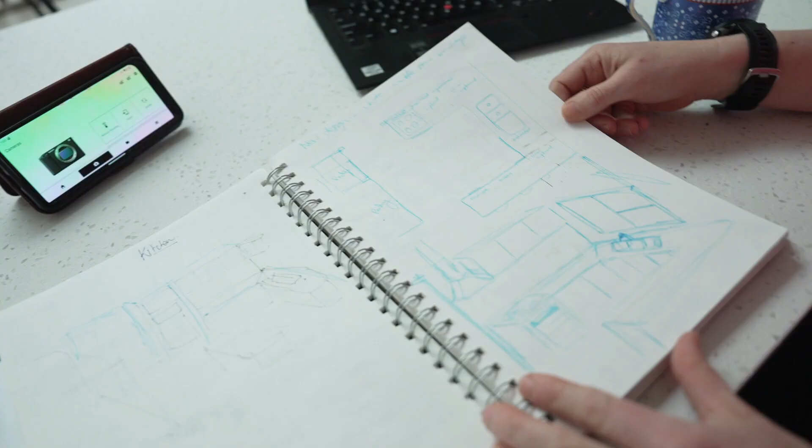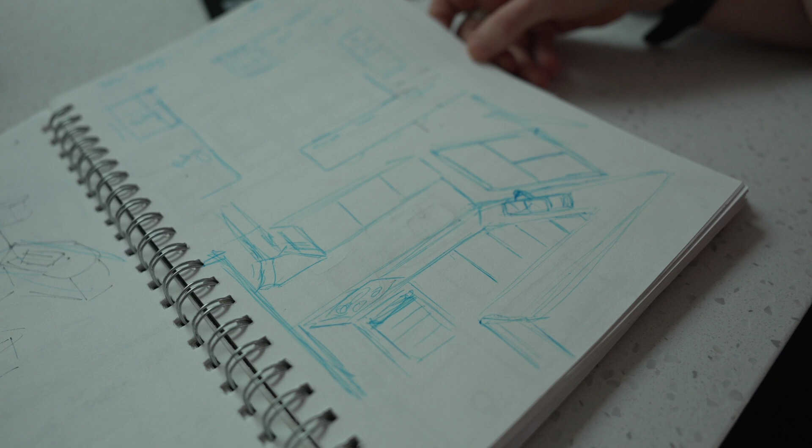So you can see as we're looking at this one, she started with a sort of 2D map where she's looking at, all right, where does everything fit? What are all the measurements? What does she want to do there? And then she's also actually drawn out a bit of a 3-dimensional idea. It's not obviously an architectural drawing, but it does give you a feel for what things are going to look like, and then you can start to place things in the space more accurately.

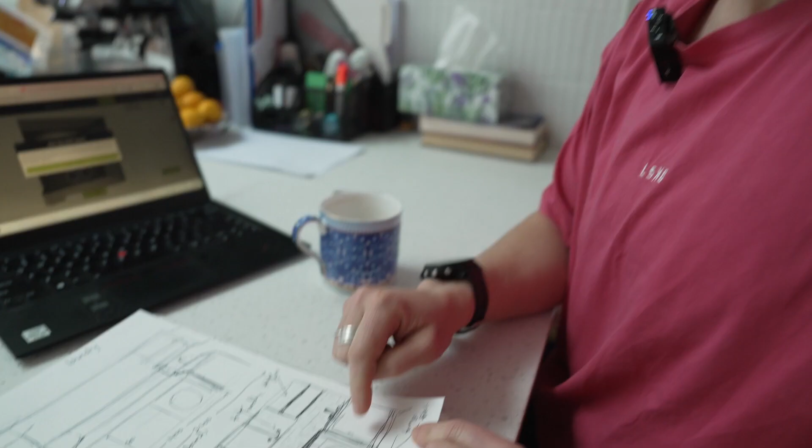That's one of the first laundry drawings that I mocked up, but that's when we still had the water heater in. So I thought, now we can change that because we don't even have to account for the water heater. Cool, so we've got our measurements all down.

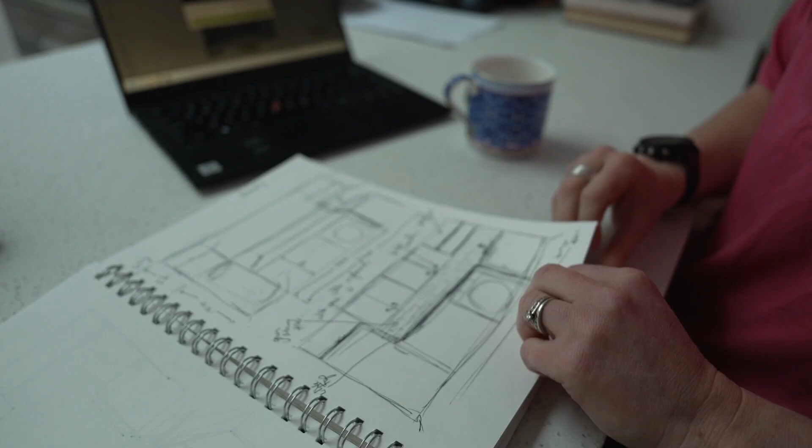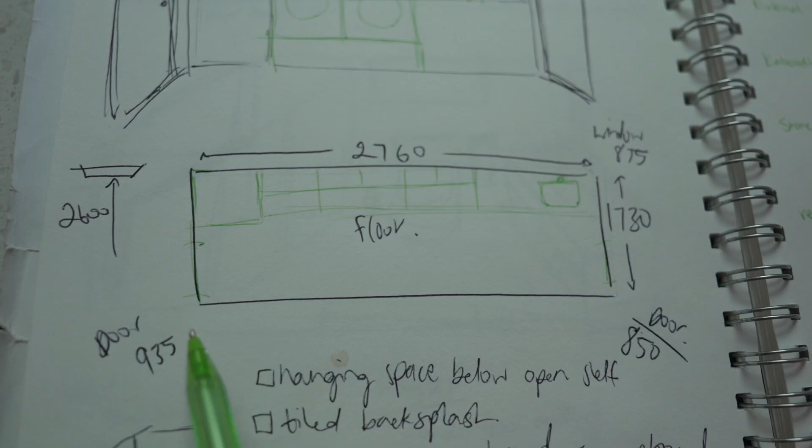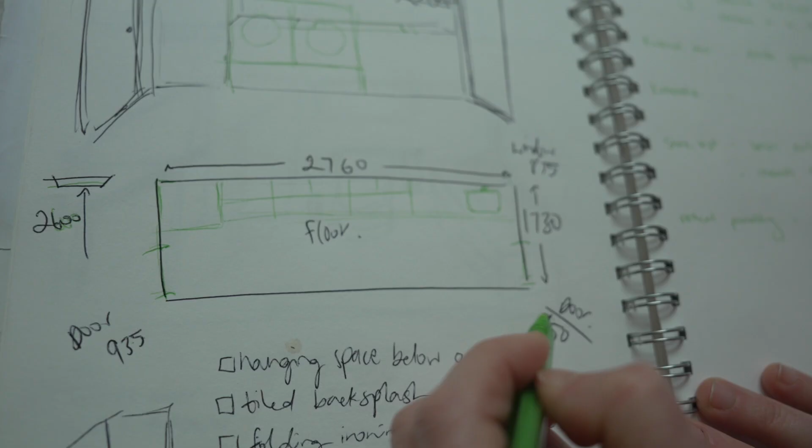So here we go. Floor plan, we've got wall length, width, and then the height is 2700 - we know that. Oh sorry, 2600, floor to ceiling. And then we've got the doors, a 935 on that side, and this side is 850. And then we have a window there as well.

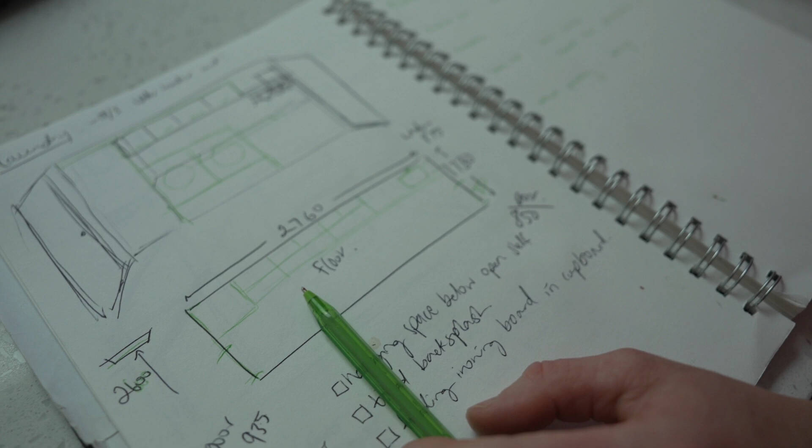So once you've got your measurements down, next step is going to be going into a great app called the Kaboodle Planner. So let's have a look at that now.

Now Jess found this awesome app that's free to use by Kaboodle that you can use to build out the laundry digitally, and you can see then like a proper 3D image. And it's really great - we found when we were measuring it on paper, we could actually see what products are going to fit in that exact space. So Jess is going to run us through that, and we'll have a look at how it looks.

So it's Kaboodle Planner login, it's a 3D planner. And then once you get into this, you will have to set up an account. And then once you've got an account, you can scroll right down through to here, design in 3D, open planner, and then you can start designing your room.

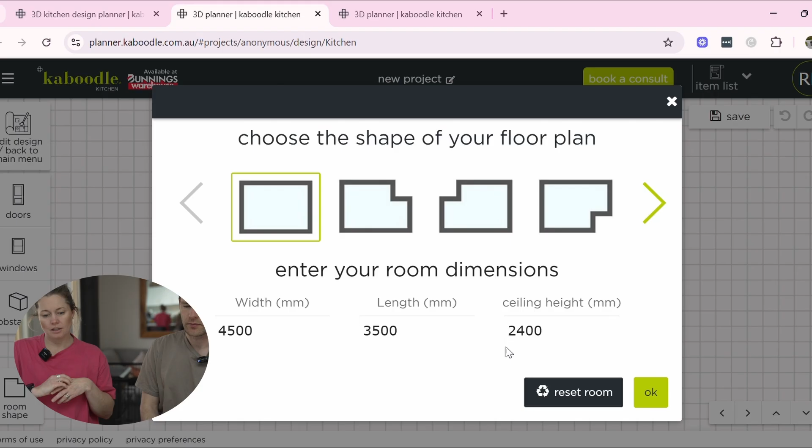Okay, so you're gonna enter in your room dimensions, 2700, and it's created my floor plan. Once you've got that, the first thing that I like to do is put in all the things that you know are there - that's your doors, windows, any obstacles that you might have in your room, like pylons or things that are in the way there. So let's add those in. We've got an internal door, and that's that one, and we've got an external door, which is that one.

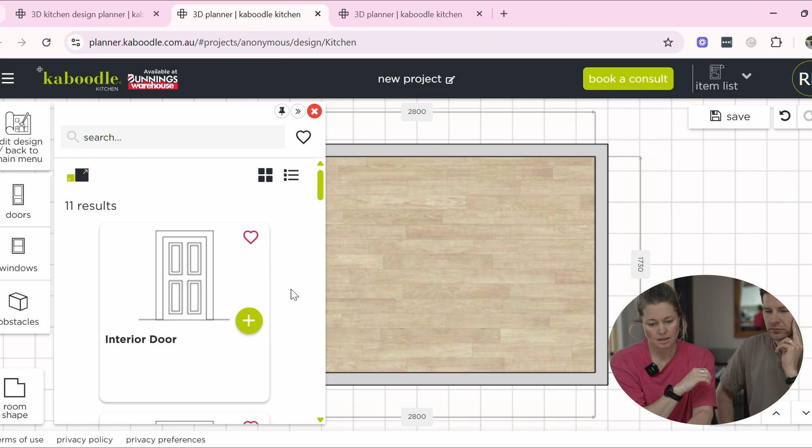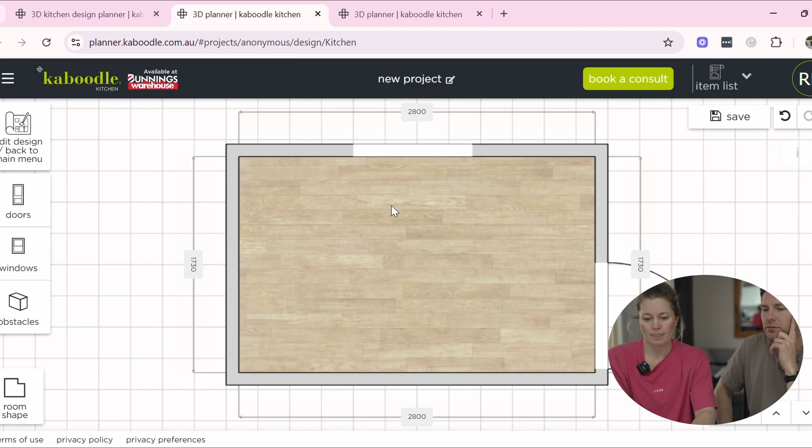So let me put them to the right size, 850, and it goes down here. It also swings a different way, so if I edit that - the internal door, 935 - we're going to place that here. Butts right up to the wall there.

And then the other thing we have is a window here on this wall. So let's add a window and put it over there.

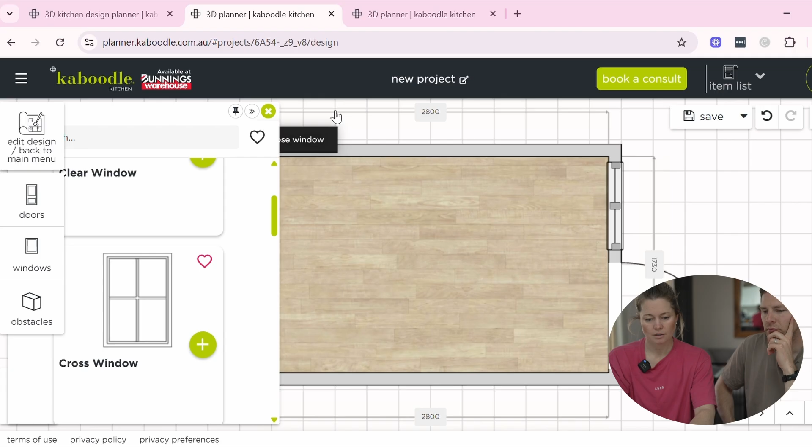Okay, so there's our room. And so now the room layout is what we've got our space to work with. Now we can start adding things that we want to add to our design. So there it is in 3D. Now you can look at it in 2D, so you can start adding things.

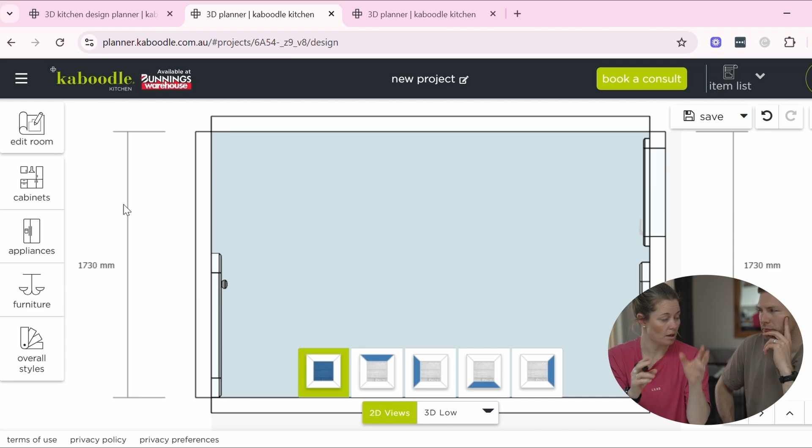The things I want to add first are the things I definitely know we're going to put in there. So that's the sink and that tall cupboard. So let's do the sink first.

It's in appliances. We've got a sink cabinet. And I want a big one. I think a 600. We've got a 600 at the moment, so we might as well add another 600. That's going to go here under the window. And then in the other corner,

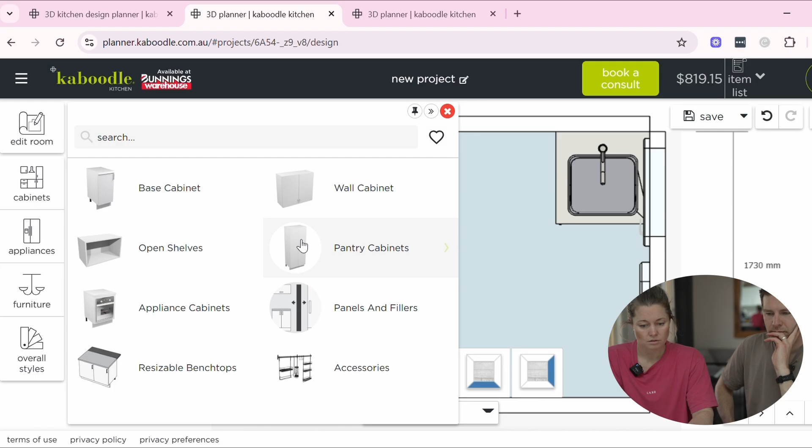we're going to do that tall pantry cupboard. And it doesn't need to be very big because we only need like an ironing board and a couple of mops and things in there. So let's chuck in one of those. Great, and it's already put in the corner there.

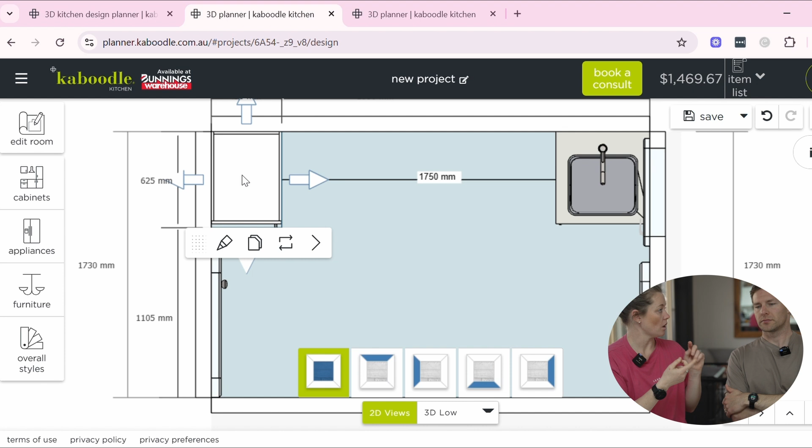Now, we've got this space, 1,750 mils. We need to put a washer and dryer and then whatever cabinetry we can. So let's chuck in the washer and dryer.

Laundry. This is good future-proofing. Even if you're doing a reno for the here and the now, think about what you might need into the future. Because if you put cabinets in there, it's obviously going to be a much bigger job to put a dryer in if you don't have one already. So even though we don't actually have a dryer right now, it is on that sort of list of, hey, it'd be nice to have one. Not that we have one now, but what happens if we were to resell? What happens if we were to put one in later? Well, let's future-proof that and make the space for it.

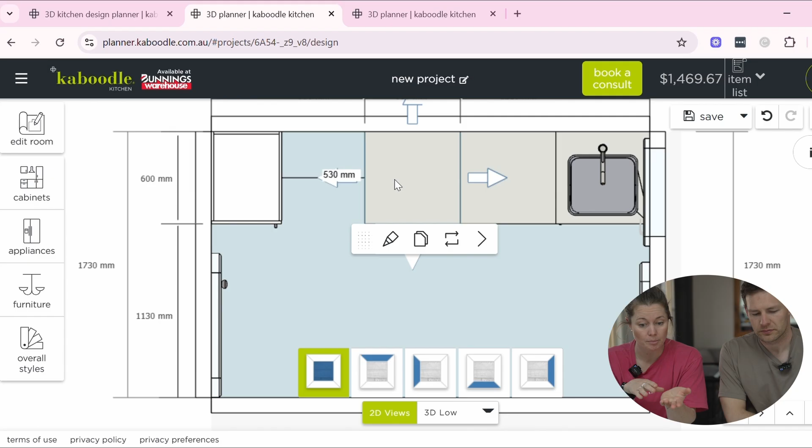Now, we've got space, we've got 530 mil for a cupboard. So if you go to cabinets, you will see that the options that you have for a base cabinet, we don't want drawers. You've got 150, 200, 300, 400, 450, 600, and then an 800 and a 900. Now, obviously, if you're going through a custom place, you could custom fit it so it fits snug and perfectly in there. With Kaboodle, you only have those certain options to go with. So we're gonna have to go with a 450 base cabinet in that space.

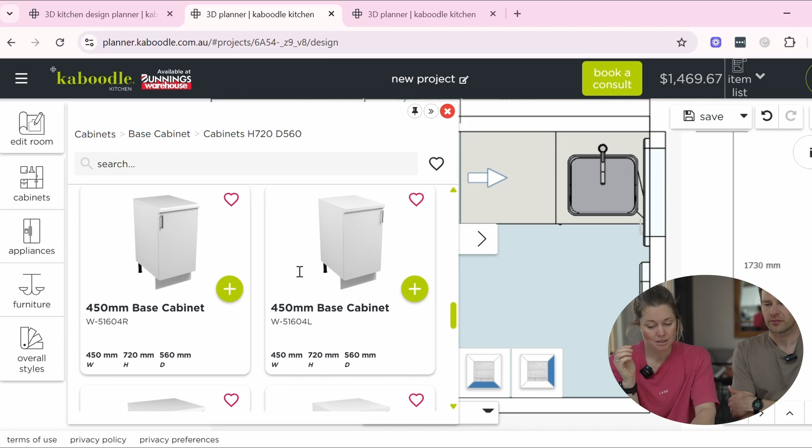So that's everything along the base there. Now we do have that slight gap. So what is that? We've got an 80 mil gap. And that might even allow a little bit of space between the dryer and the sink. Yeah, if we need to move them over. Yeah, so not bad to have a bit of wiggle room. And they often do talk about, because these rooms aren't always exactly square, just have a bit of play to put some bits and pieces in between if we really need to.

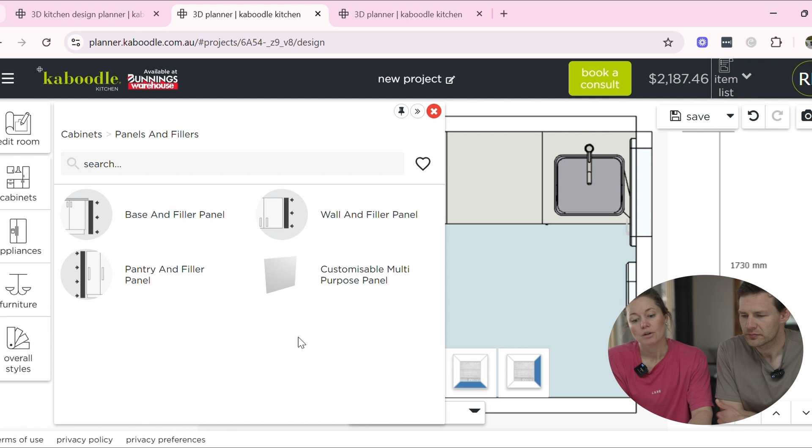You will see too, they have filler panels. So you've got those there as well, and they can be customizable as well. So that might be something that we might need to purchase. So pantry and filler panel, there you go, to fill that space, which is an easy solution. So that's the base. Cool, what does that look like?

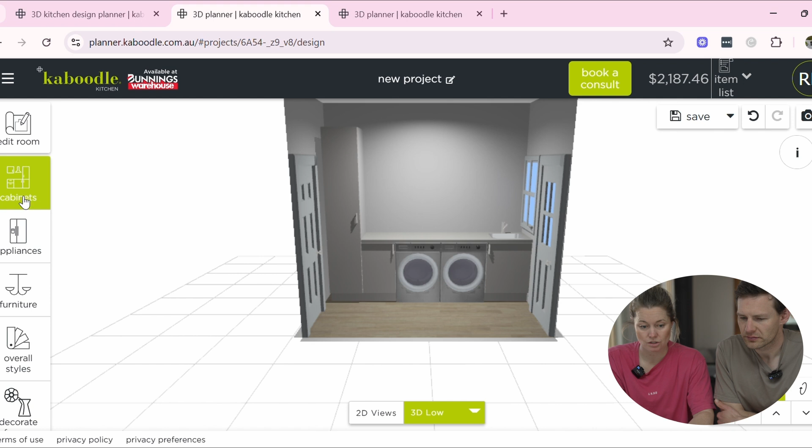Oh, let's go 3D. Okay, we're starting to get a feel for at least the space. Fits quite nicely. Yeah, I think it looks good. The next thing though, I want to put in some overhead. So let's chuck that in and see what that looks like.

Let's go cabinets. These are wall cabinets. There's lots of different types and styles that you could do. I think we're just gonna go these ones, the wall cabinets.

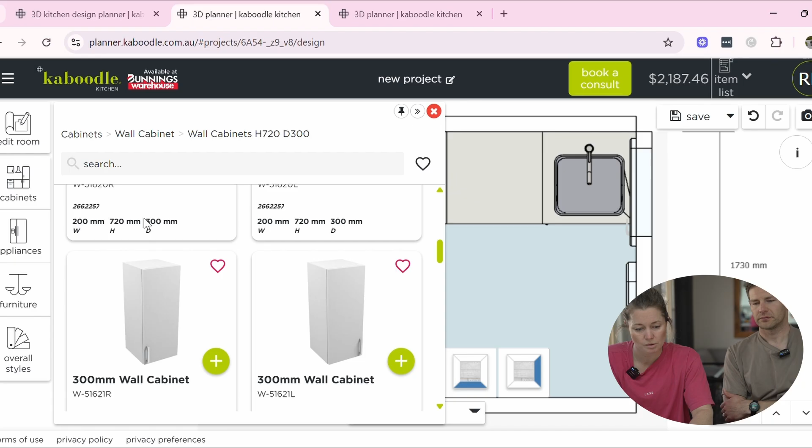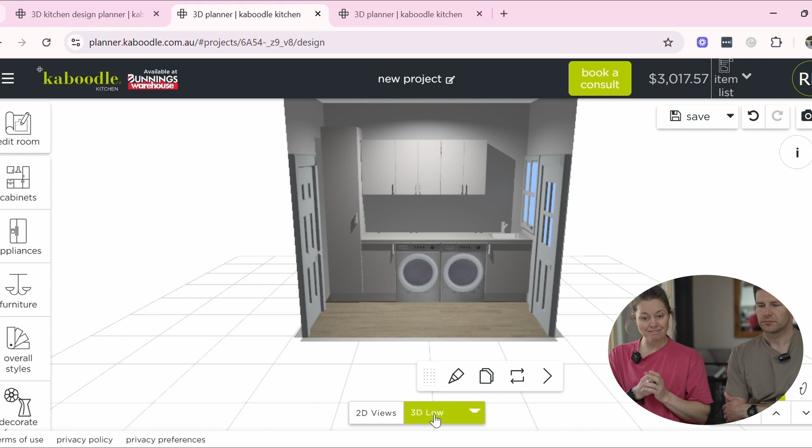Now I kind of want them to match what's below. So we've got, what, a 650? 600s for the washer dryer space. And then we've got that 450. So we will do a 450 wall cabinet and then a, what was it, a 650 or 600? 600. 600 wall cabinet and a 600 wall cabinet. And hopefully that, perfect, there we go. So it matches above what's below. Awesome. That is the start of the basics of what it looks like.

The next thing though we can change and have a look at is doors. What kind of doors do we want? Well, we've got in our kitchen, we've got Alpine. So it'd be nice if we keep that through. Alpine in macaroon. So let's do that.

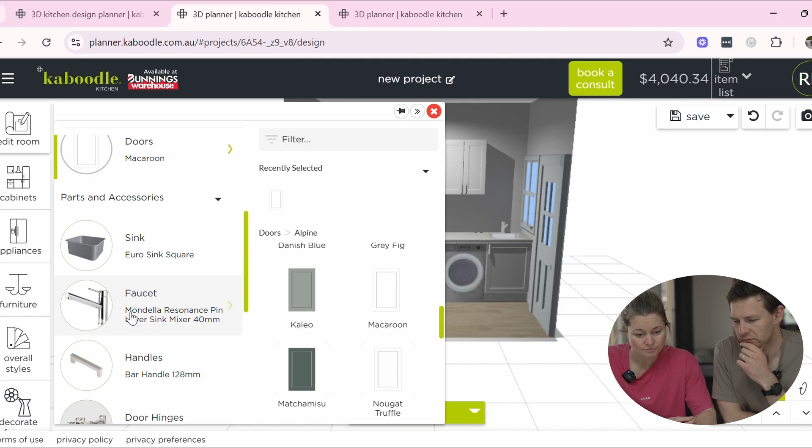You can add all these things here as well, different types of handles. I think we'll just stick with silver for a bit. But all this is going to calculate for you automatically, because this is all stuff from the Bunnings range, so it keeps adding and calculating everything.

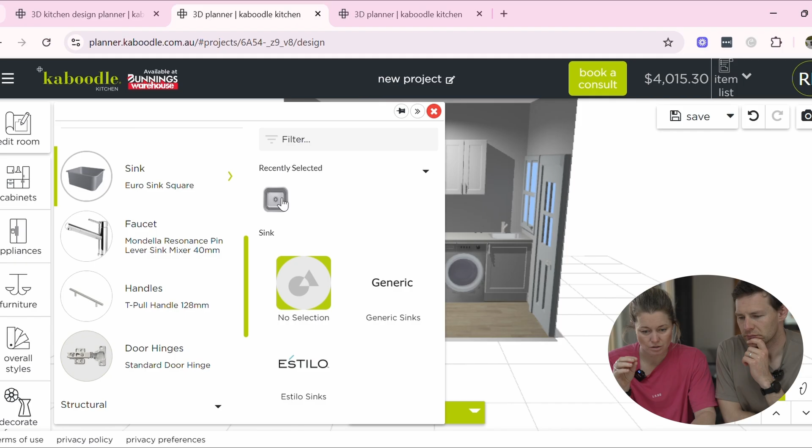Your tap, we'll just go something like that, nice and simple for now. Sink, just want a big square sink. Let's have a look at that for a minute. Yeah, cool, I think that looks great.

I think just being wary, the lighting in this rendering program probably does make things look a little bit different to what they truly are, because we've got at the moment a single light that's projecting on those top cabinets, making them look white, but in reality all the cabinetry is white.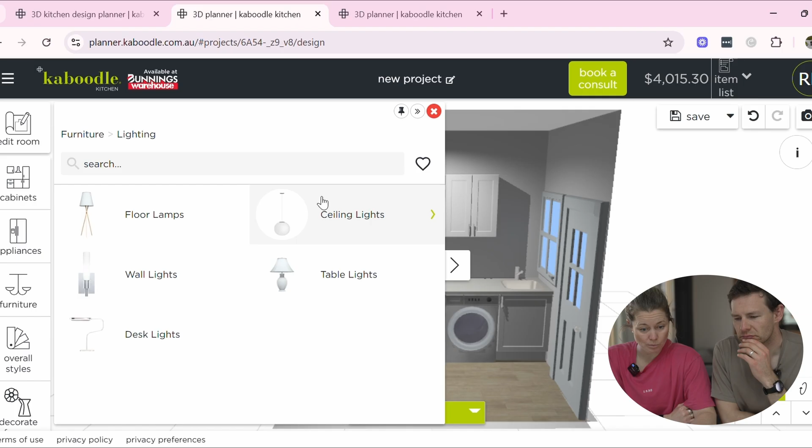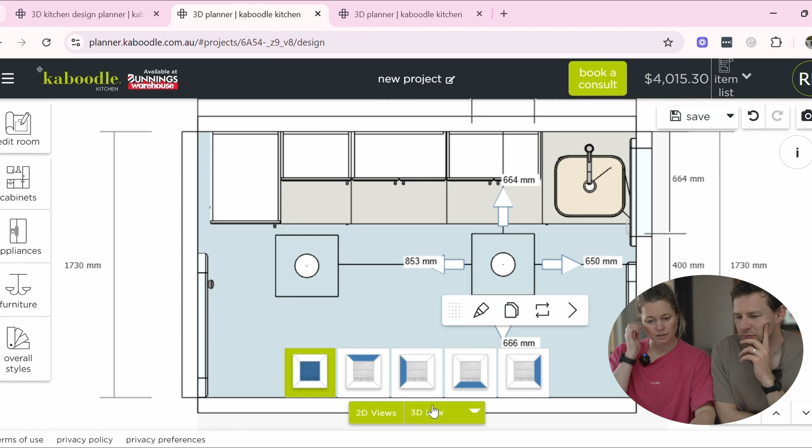We can even add lighting in here though, and that will help brighten that up. So we'd probably just do some recessed LEDs, wouldn't we? We just add them in, and even already that brightens that room up a lot more. If you look at 2D view, you can even move them to where you want. There you go, let's see. Yeah, so that's brightened that up already. That's cool.

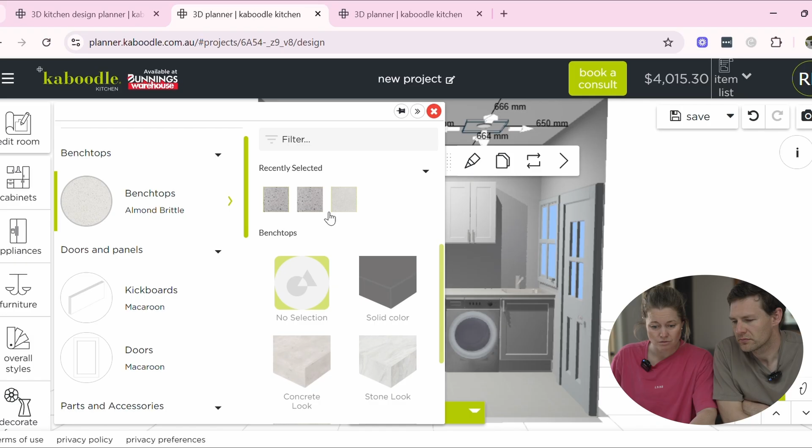Another thing you can do with this is add different styles and things like tiles or a different floor. I know we'd probably go a tile for the floor, like just a simple white tile maybe. And then the bench top, you can change the looks of that, so a stone look one, might go like a terrazzo style stone. Add that all in. You can even do a paint color on the walls if you want to.

So here we go, wall paint. Let's just do a light greenish to match the rest of the house. So there, that's something that looks fairly close to what we might build.

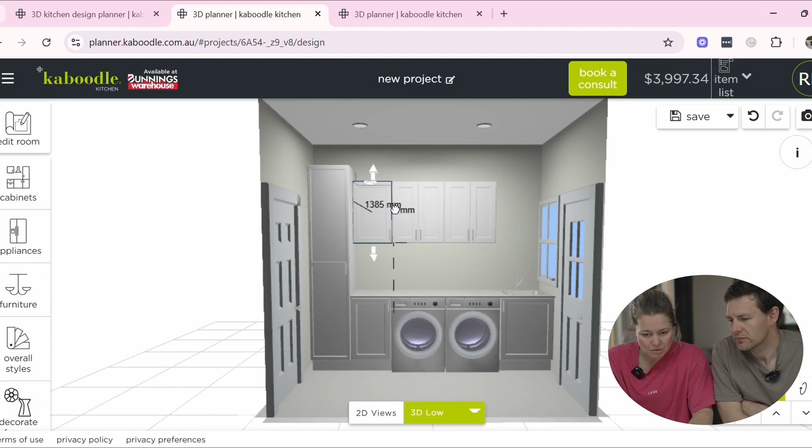One thing I would think about doing though is maybe we move these up so that height, if I can, so that's a nice clean line across the top there. And that might even give room for a hanging space, like a rod underneath to hang things on if we wanted to as well.

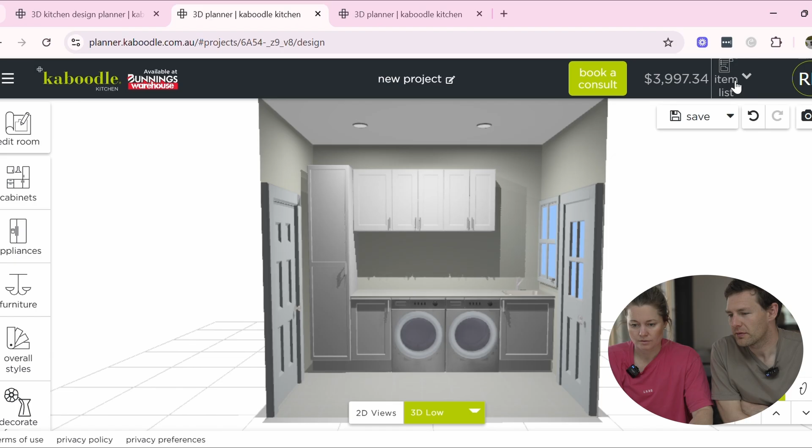What about the costing? We can see it at the top of the screen, just coming in under four. So this gives you a budget now to look at what it actually needs to cost for these raw materials to get them in. And it gives you an item list as well, so you can see where the cost is coming from. Considering you get a lot there, it's quite good value, isn't it?

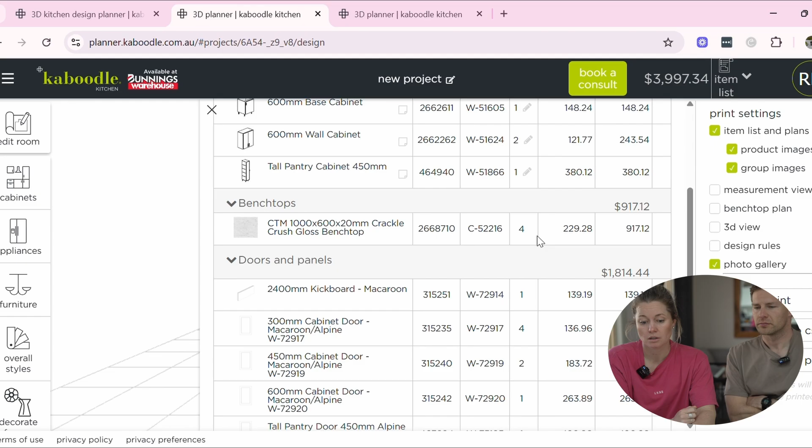Something though that I think we would probably do is not do the bench top through Bunnings. There's a local stone guy and we'd probably get him in to do the bench top instead. So take that cost out, what is that? Yeah, so that's $900 for their stone tops here with Bunnings, but we'd probably use the local stone guy, so we'll take that out.

So a pretty good estimate, and I think what we'll do is go up to Bunnings and actually just talk to them on the spot, say hey this is the plan we've got, and they'll look at it with their expertise and say oh yeah, you need this bit, you need this bit, don't forget this bit. It seemed to work pretty well when we put the kitchen in, so I'm assuming it will work well for the laundry. Yeah, so thanks for tuning in.

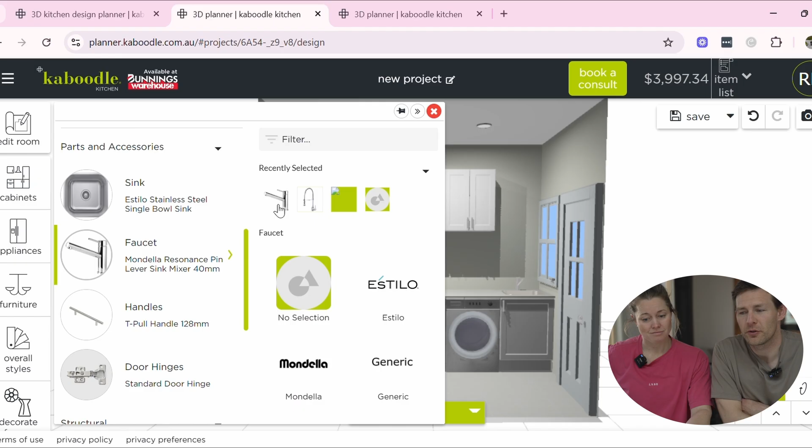The next step we're going to do is make a list of the steps in this renovation process. I already made a short one, and looking at this, we've got to get the electrical and plumbing done first before we start to pull things off walls and get rid of things. We've also got to order things from Kaboodle, talk to the stone top guys, and then stay tuned for the next step where we'll show you the renovation step by step.